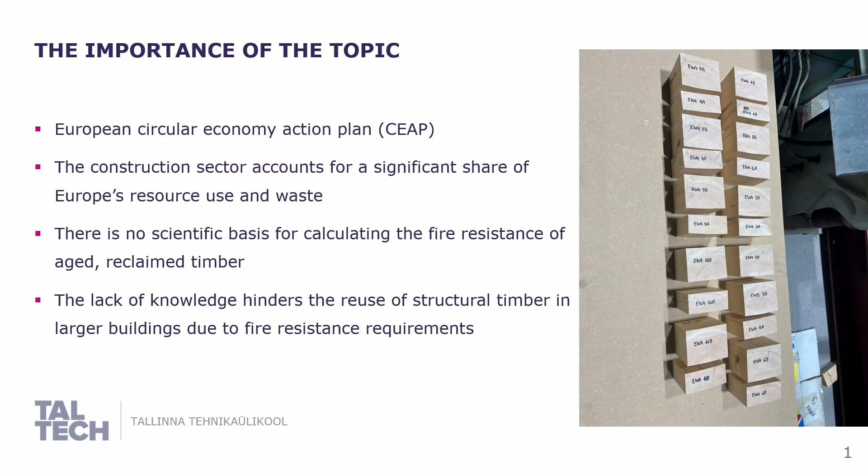The aim of this thesis was to determine the charring behavior of aged timber through experimental testing. Secondly, to add and compare new experimental results to earlier studies, and lastly, to make recommendations on whether existing fire design guidelines for new timber, specifically those provided in Eurocode 5, are likely applicable to aged timber.

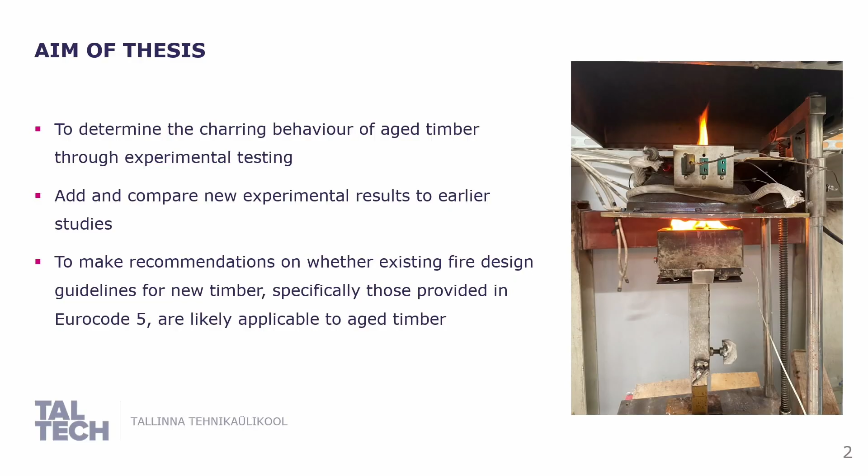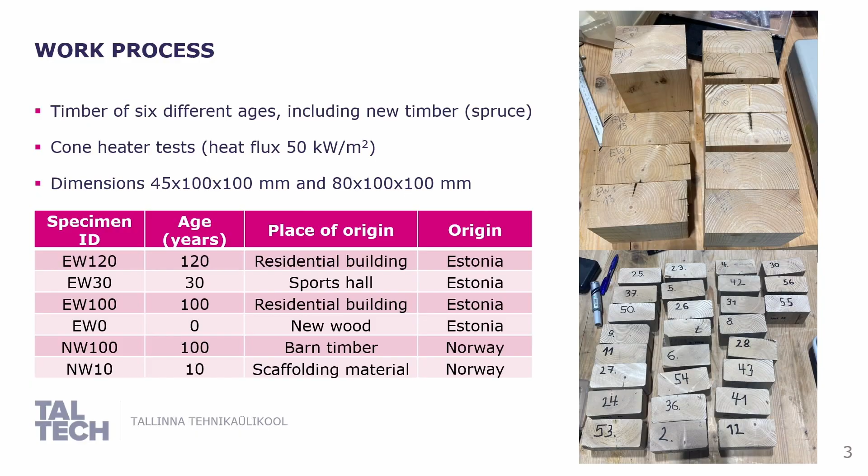Now about my work. I tested 6 different types of timber, including new timber. The aged timber ranged from 10 to 120 years. This aged timber came from Estonia and Norway, and it was taken from residential buildings, a sports building, barn timber, and one material was used as scaffolding material.

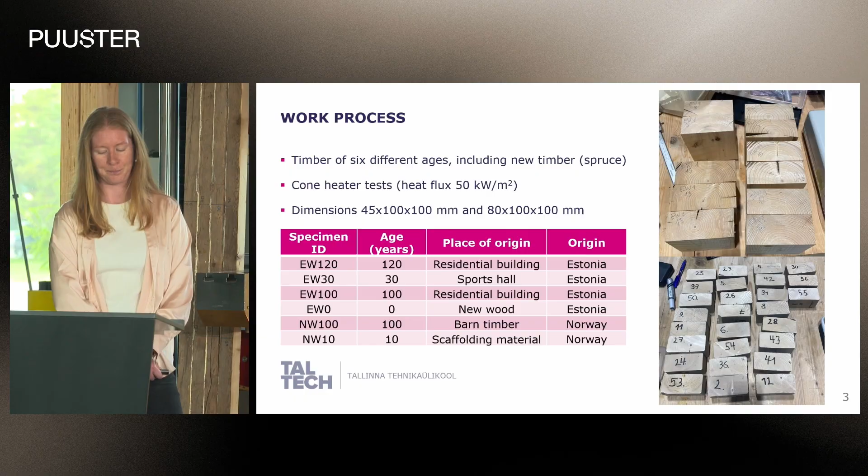I used a cone heater for the tests. The test specimens used were 45 millimeters thick or 80 millimeters thick, depending on the size of the raw material. Here is a small overview of the materials I tested. I tried to choose samples with similar cross-sections so that the annual rings were as close to perpendicular to the heat flow as possible.

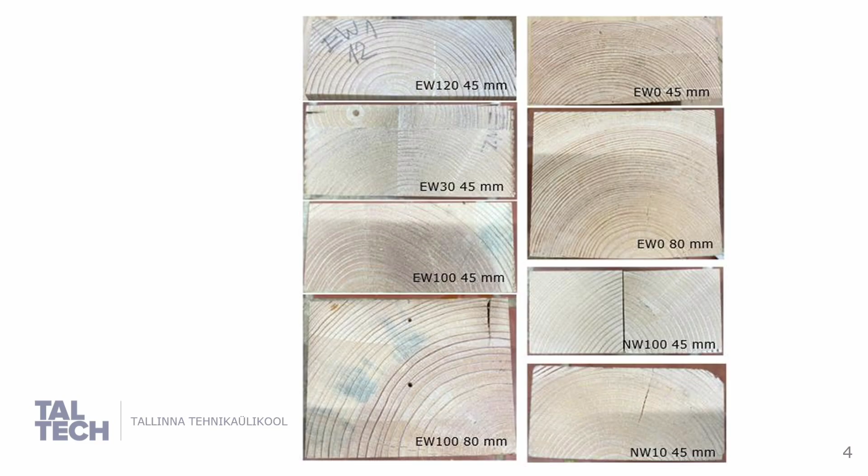The test program looked like this. I did 48 tests in total. The test durations were 15 or 30 minutes, and I did 3 tests with each material. The Norwegian timber samples were made from 2 smaller blocks tightly put together because the original material was not big enough to make one solid sample.

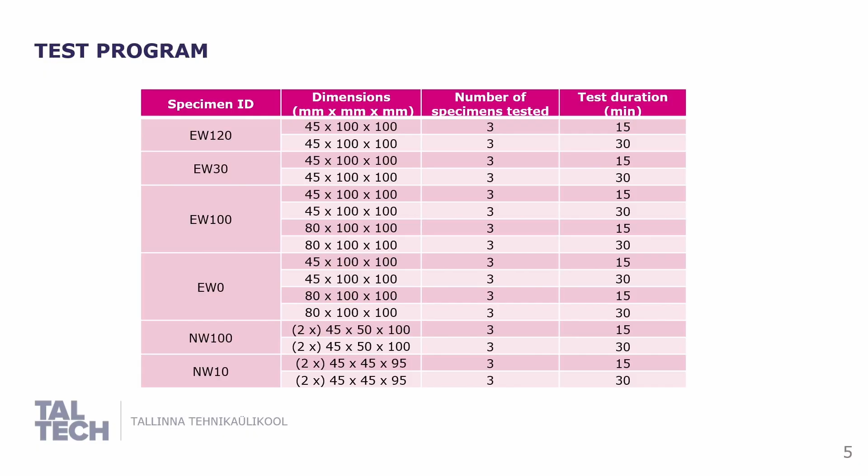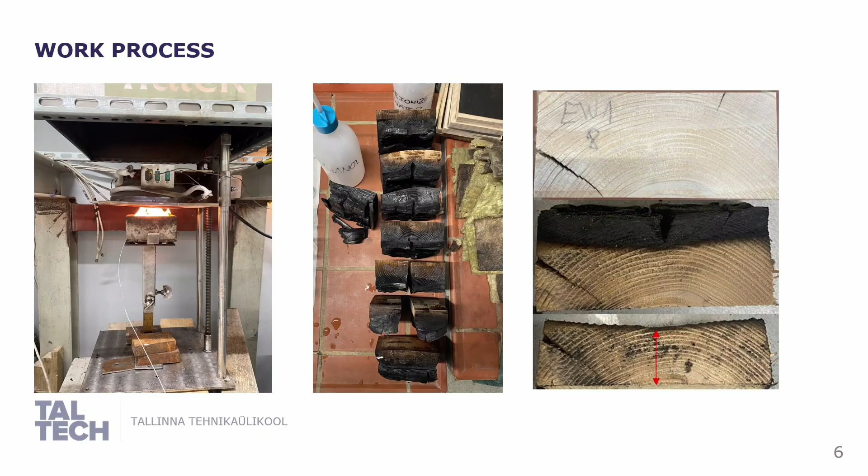In this picture, you can see the test procedure. First, the sample is under the cone heater, then the samples after cooling down, and finally, you can see a sample before burning, after burning, and after removing the char layer. I measured the remaining cross-section by cutting the sample in half and measuring the residual cross-section exactly in the middle. From this, I calculated the thickness of the char layer and the charring rate.

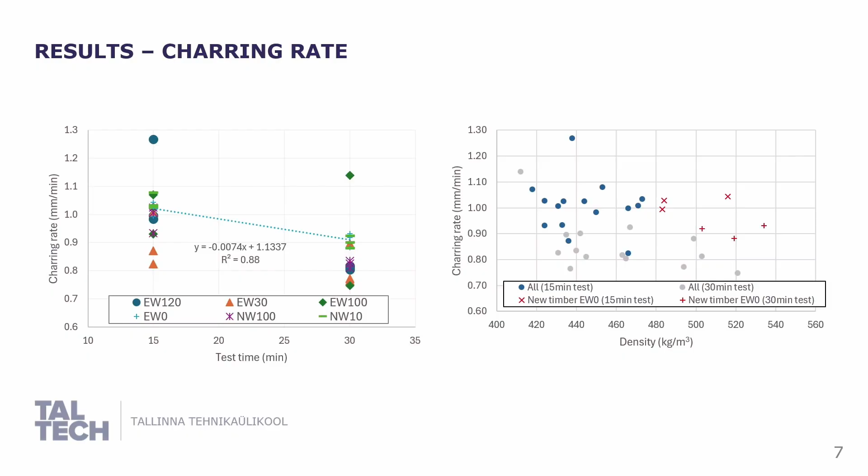The right graph shows how charring rate depends on the timber density. Red shows new timber results. This graph also shows that aged timber had similar or even lower charring rates than new timber, even though aged timber had generally lower densities.

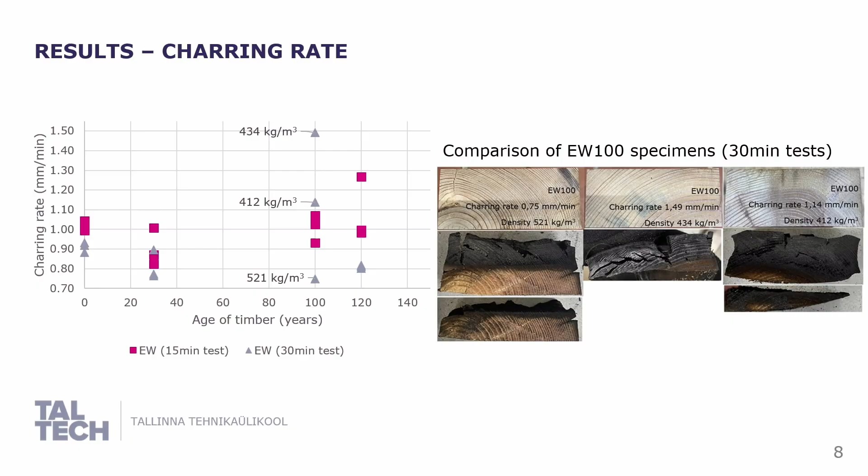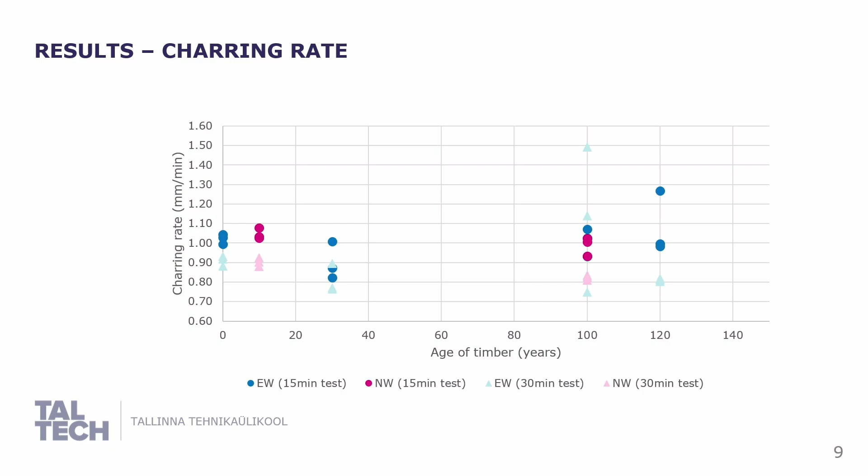This graph shows the same data, but for all samples together. You can see that new timber and, for example, 10 and 30-year-old timber charred fairly evenly, but the 100 and 120-year-old timber showed much bigger variation in charring rates.

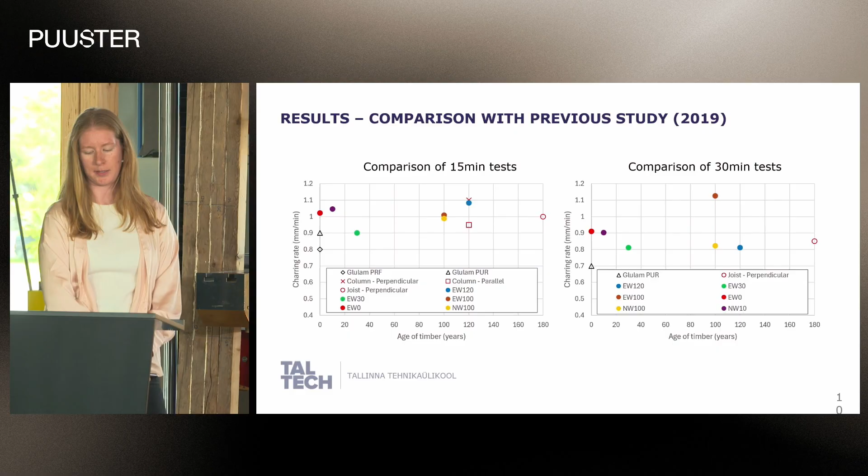This graph compares my results with an earlier study done in Canada in 2019. It shows charring rate in relation to the age of timber for both 15 and 30-minute tests. My results are shown as colored dots, and the previous study's results as empty dots. Both graphs show that my results and the earlier study are very similar, with very little variation.

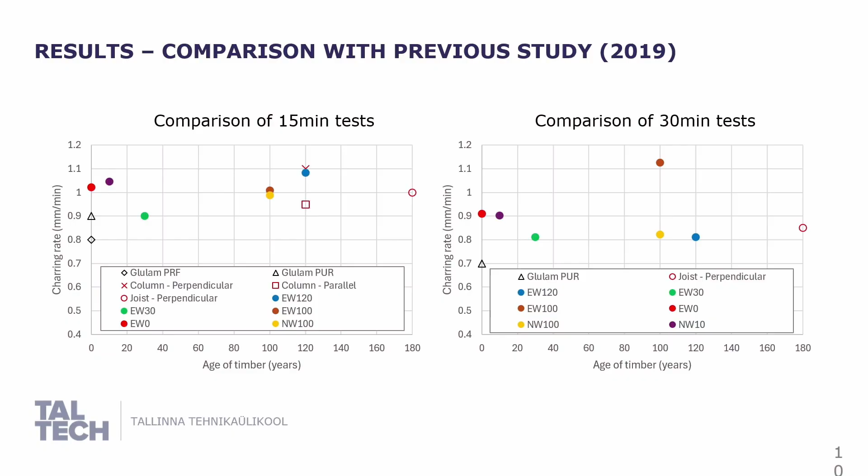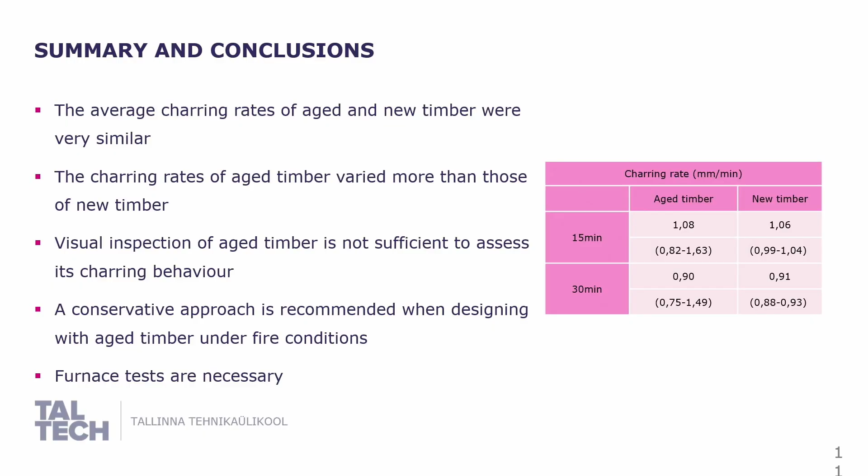In conclusion, the average charring rates of aged and new timber are very close, 1.08 millimeters per minute for aged timber and 1.06 millimeters per minute for new timber in 15-minute tests, and 0.9 versus 0.91 millimeters per minute in 30-minute tests. Also, aged timber showed much more variation in charring rates than new timber.

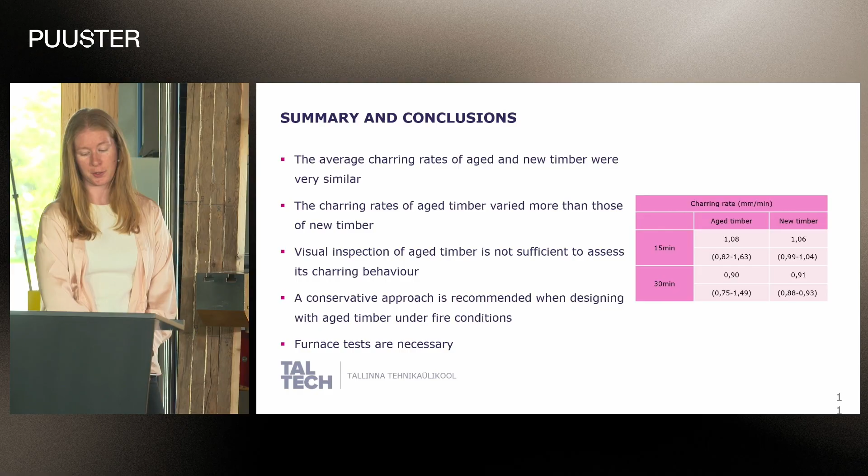Also, visual inspection is not enough to assess how aged timber chars. A conservative approach is needed when calculating fire resistance for aged timber, and furnace tests are necessary for more accurate results. However, based on my work, aged and new timber should show very similar charring rates in furnace tests as well.